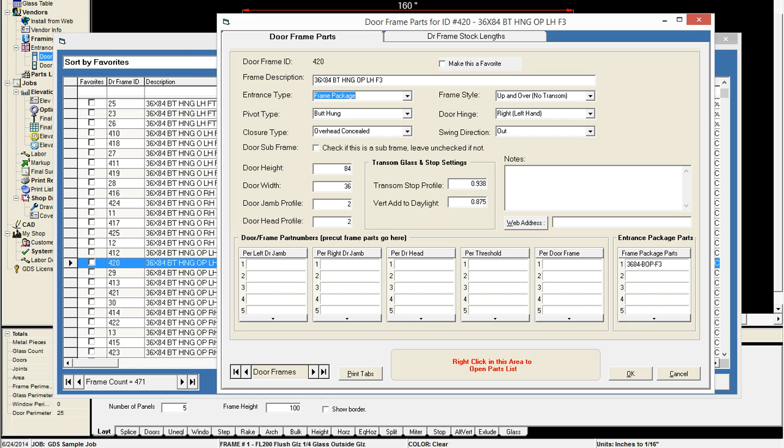Now if a frame package part number exists and we have stock lengths, it's going to use both. So whatever parts are here are going to get picked up by the software. It doesn't really care if it's package-configured for this entrance type, or if you tell it it's a stock length entrance—that's more just to help you identify what you're selecting. As far as the program's concerned, if part numbers are in these different columns, and there's stock length part numbers, it's going to pick them all up.

So in this case, you would want to decide what you need and what you don't need, and remove what you don't need. Let's say we need to add a door jamb stock length. I'm going to right-click down on the parts list box there—their frame descriptions are pretty brief.

Since we are looking for a stock length, I can do a couple things to filter the list. I can put a '2' here because most stock lengths are 200-something inches, or you can see their part type is extrusion. Let's do a little experiment: if we search '2' for stock lengths, we see 179 parts, and if we search extrusion, there's 184. So there's a couple stock lengths less than 200 inches.

So let's use extrusion to help sort these out. I'll try typing in the word 'jamb.' The thing is, it might show us wall jambs too. So if we do 'door'—offset door rails, so this is for door rails. You can actually do stock lengths for door leafs as well, and we'll cover that in the door leaf webinars.

So we might just be making stuff up here. Let's say this is a header for door frame, offset door header, vertical mullion door jamb—let's call it this one. It's an FL209, that's the extrusion we want to use for that jamb. We can go ahead and use that same one for the right jamb, so we type in the part number. Remember, you can always right-click and pick it from the list, or just type it in.

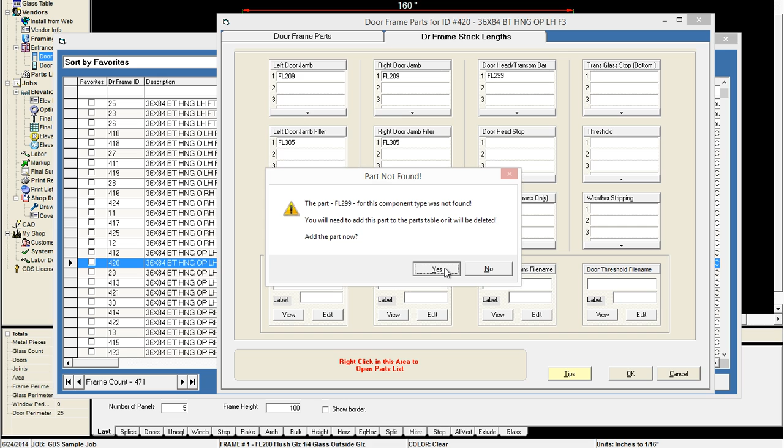We'll say yes, and this is where you'd kind of have to know some information. If your standard multiplier isn't there, you can just leave it at something else and change it later. You can always change it in the final parts report as well. So we can just make up some prices for the colors here, and just go with that.

So this is where we would pick the part type, and we could say door frame part. Actually, what's best to do here is make it an extrusion. Since it is a stock length part, it's more important for the program to know that it's an extrusion or a stock length. Either one would work. So if we scroll down, we could pick stock as well.

I kind of like extrusion now because that's a little more descriptive. But the program needs to see that part type for a few different things inside the program, especially when you get to the optimizer. So no matter if it's a door frame, a jamb, a head, sill, vertical, whatever, if it is a stock length, it's best to pick that part type here because the rest of the program is happier that way.

The profile is more for just your information if you ever want to find this part again. Let's say it's a 2-inch. And the stock length is important. We want to tell it if it's a 289 or a 288 or whatever it is, 290. So that's completely usable too.

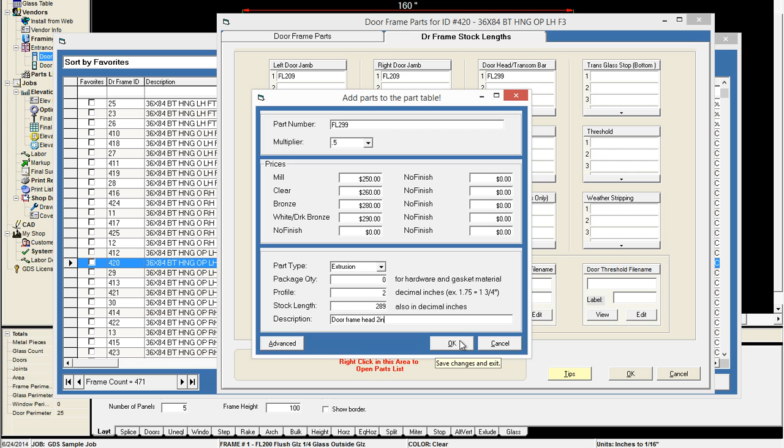So now I've added that part to my door head transom bar. And so we could do the same thing here, using a different part number. So you get the idea—you can add as many parts as you want in this screen, and the software is going to pick them all up. So let's go ahead and verify that right now.

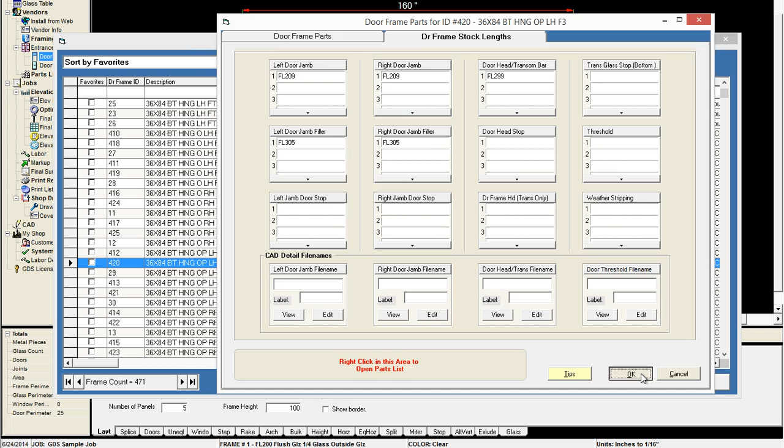So we were using door frame number 420 ID. These IDs are helpful, especially when there's a catalog that looks like this, because there's so many 3684s, there's so many butt hinges. It's an easy way to remember maybe what we were looking at.

Another way to do it is check the favorites box. And I like to click off of it—you'll notice when I check something or change anything on this row, it puts this little pencil here. That means I've edited something in this row. I can either arrow up to the next row or click on another row, and that ensures me that it saves it. I like to do that before I close the window.

And so now I'm going to close. So what I did was I changed this in the master parts list—I went to the master door frame list, not parts list, but door frame list. Went to the master list of door frames. I made a change to that ID number 420. And now I want to apply that change to this job.

The other option was I could have gone into this job and edited the door frame, which is a different frame. Like this one's left hinged. Now I forget what we picked here—let's go back and double check. So yeah, this was a right hinge, left-handed. So I'm going to be switching that.

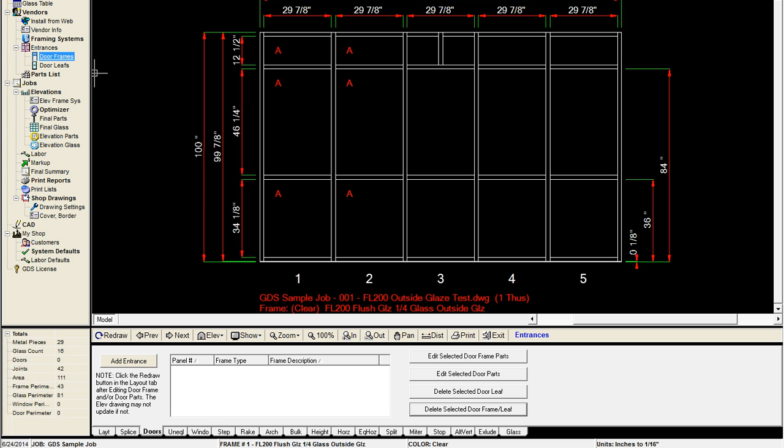So now I want to go to the add entrance. I'm going to tell it the same panel 3. I'm going to add the door frame, and I could add a complete entrance that uses this—let's see, how come it's not sorting? There we go. That uses this same door frame, and it would pick up the change. Or I can just go straight to this door frame and add it directly, and then it's going to add that door frame in.

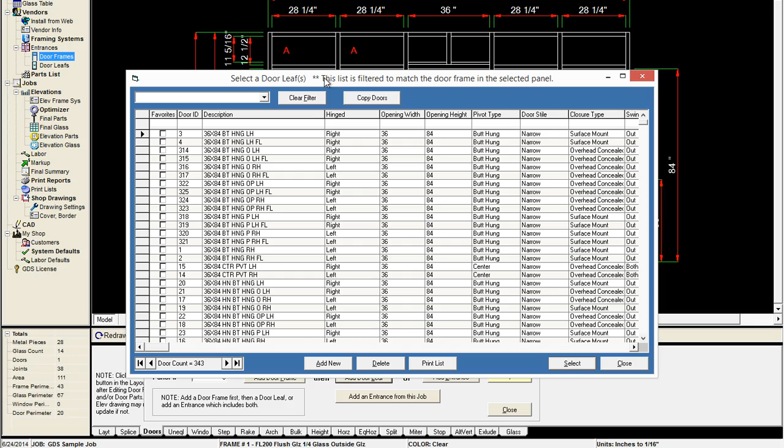Let's go ahead and add a door leaf real quick too. Since I've added the left... what was that added again? I got such a bad memory. I think it was right-hinged, left-handed, so it's coming up with a butt-hung left-hinged door leaf. Let's go ahead and select that. Yeah, there's our right-hinged, left-handed door.

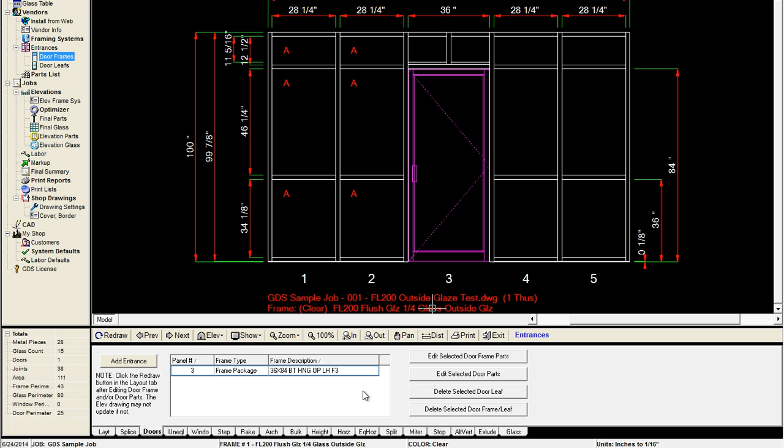Now what we're going to do is close this. We're going to go in and edit the door frame parts just to make sure it's using that same one that we picked. So here's all those part numbers I added. Those are the stock lengths.

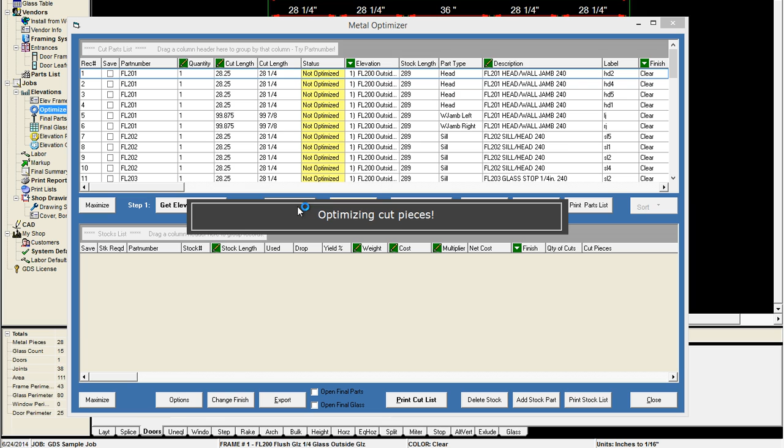Now I'm going to go ahead and optimize, and we should see those stock lengths be added into the optimization. I'll hit optimize, though I wouldn't even have to hit optimize to notice that. I could have hit get elevation parts and just maximized here, and then I should be able to see door jamb.

Here's some door jamb stock lengths. Here's a door head stock length. That should be that 299, right? So there we see all the stock lengths that I've added for the door frame.

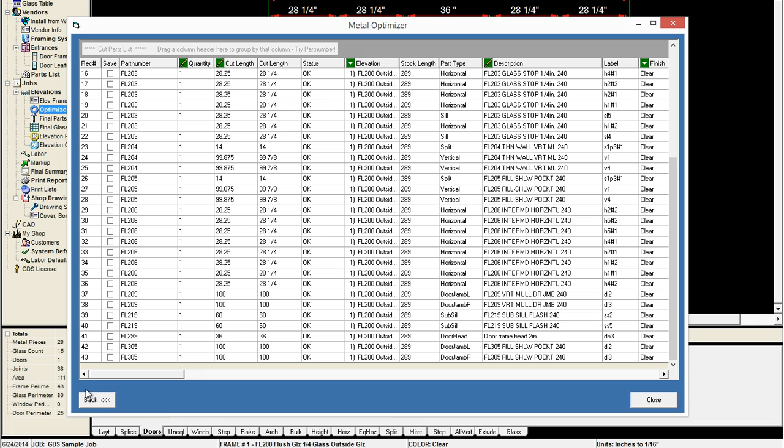So in order for those to show up on the final parts report, I would have to hit optimize. But in order to ensure that they were pulled in from the elevation, I can simply look at this top list after I get the elevation parts. Remember, in the optimizer, when I hit get elevation parts, it's pulling all the different cut piece stock lengths.

So only stock parts are used in the optimizer. It's looking at all the different stock parts for door frames and the elevation frame itself, and even door leaves if you told it to put stock lengths to create a door leaf. Any of those cut pieces are pulled into the optimizer in this top half. Then when we hit optimize, it's figuring out the optimization of how many of those cut pieces or how many stock lengths are required to get all those cut pieces out of. So that's the process there.

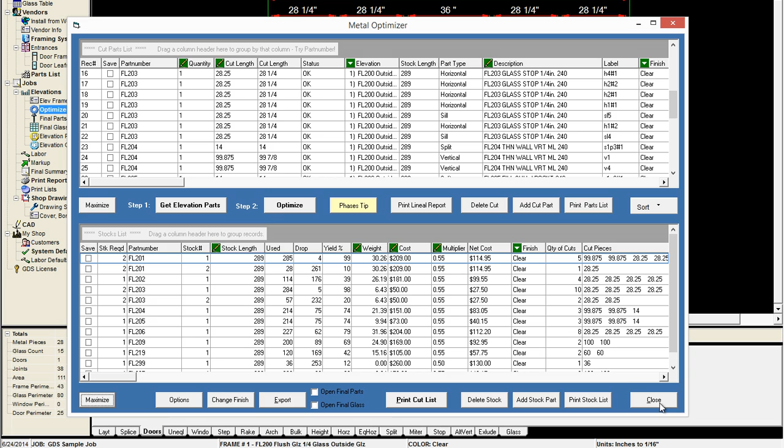Now we can go to our final parts, and we should not only see a package part number for the door frame, which is right here, the 3684 BOP. That's the door frame package. We should also see the stock lengths that we had. Here's the FL299, I believe that was the 219. So that's where anything that's added to that stock length frame is going to show up here, to the frame, door frame configuration, along with the package parts.

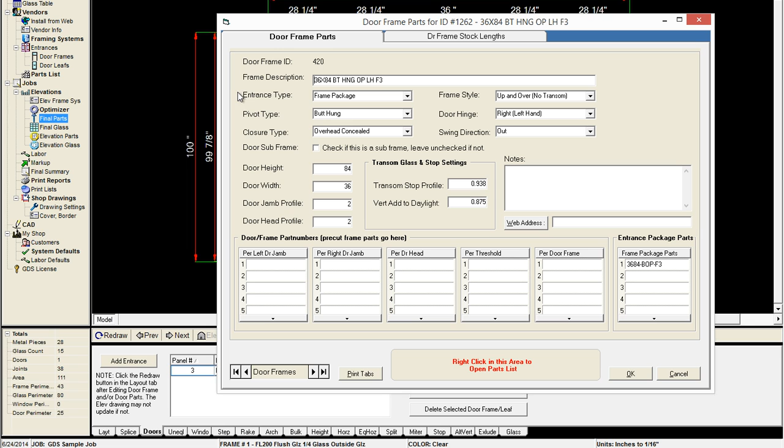And the same thing goes, let's go back to, let's edit the door frame parts here for the elevation. So it's a little confusing because this screen is exactly like the master screen, only it only affects this particular door frame in this elevation if I click the button in the doors tab like I did down here. So when I click that doors edit door frame parts button in this door tab, it's only going to let me edit the door frame in this panel for this elevation.

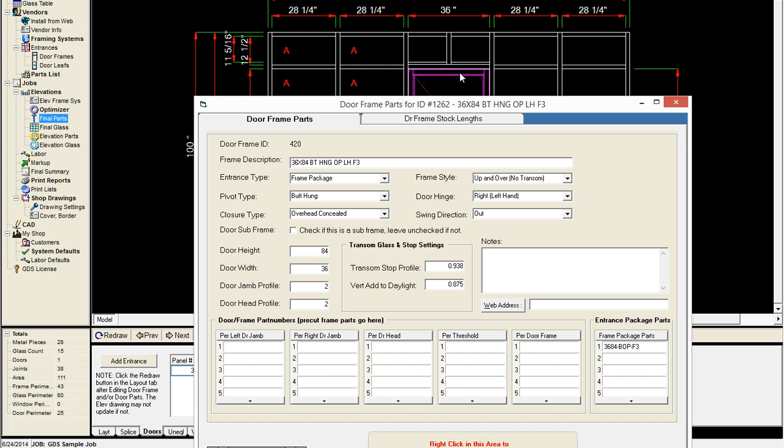Because I could have multiple doors in this elevation, and it would show me which panel those doors are in. So whichever one I click on, that's the one I'm editing here. So you just have to keep that in mind. Just like we've talked about in the other webinars, you need to know when you want to edit master parts and master frames, and when you want to edit the ones in a particular job, a particular elevation. So that's up to you. Once you have that figured out, I think it's a pretty powerful tool as far as how it's done.

So the same thing goes here for door heads. If it's a prepackaged door head, if it's a prepackaged threshold, any other miscellaneous per door frame part, whether it's a striker or some sort of latch or hinge or whatever, that can be put here. These are really the same because they're kind of generic. All these parts are treated generically. It's just helping you decide or know what's what by labeling these columns. And it also helps when it shows up in the final parts report—it looks in these columns and determines what it is from these column heads. So that's why it's important to put them in the certain spots.

So now back in the stock lengths. Anything you put here is going to go into the optimizer with the exception of weather stripping. Weather stripping is a little different, that should show up as gasket material. So let's go ahead and click on weather stripping. We're going to go here and let's see if they have anything.

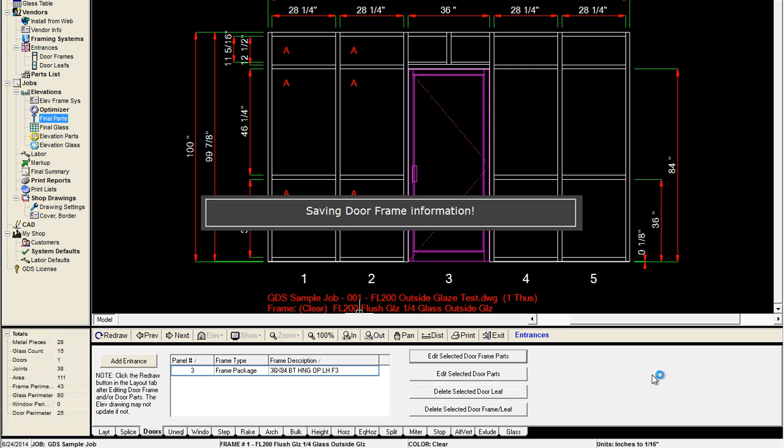Now what should happen is the weather stripping should show up. Let's go to elevation parts, even though there's only one elevation. I think we're in the sample job, so we're going to go to elevation parts. We've got the one elevation. Now what we should see is the weathering.

Sometimes you have to redraw. Did I show weather? Yeah, there it is. So there's our weather stripping. It's saying we need 17 feet of it.

Notice how I didn't have to go to the optimizer. It's a little confusing, the fact that we went to the door frame parts, and in the stock lengths tab we threw in a weather stripping field. But that's the only thing in here that's not, aside from the details, a stock length part, because everything else would show up in the optimizer and get optimized into stock lengths for your final parts summary. So the exception here is weather stripping.

You notice that when we added that in, it redraws the elevation and then it shows up right away under elevation parts, which means it's also going to show up under final parts.

Yeah, so it's the last thing here. It was a W part, and it just calls it miscellaneous.

That might be because when we got into it here, now that I've added that part to my job, basically through the framing system stock lengths tab, I can make changes to it, but I need to make changes in the job parts window if I only want to make changes to the job for that part. So I want to go to edit job parts. We're kind of going a little bit off tangent here, but this is important to know.

The reason that miscellaneous showed up under part type is because that's what the master parts list showed for this type of part. So if I want to change that, I can click in here, and I'm looking at just the parts for this job now. So if I make this change, you'll notice when we go back to the master parts list, it won't be there.

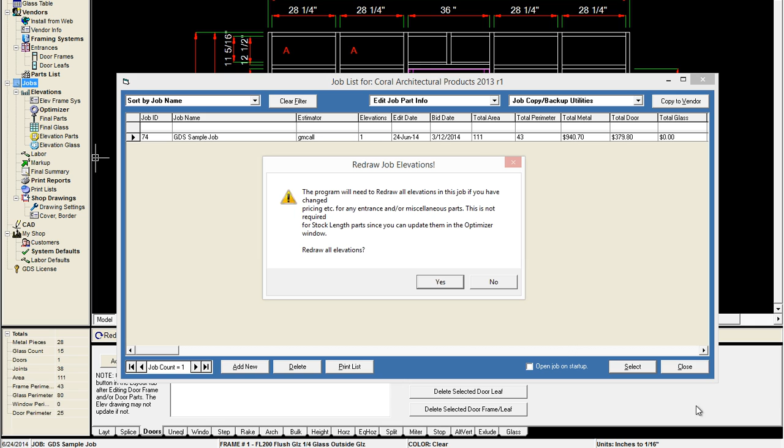But I can put weather seal. We have an actual part type that you can select for weather seal. So once I change that, remember how I like to click off of this row, so I'm going to arrow up to the next row. I can hit close. It needs to redraw the elevation, which is fine. And then I can hit select, and actually it'll redraw it again when I select it.

Now when I go to elevation parts, I should see that weather... where are we here? W, oh, it's down. So see, I changed the part type for weather seal.

So I updated this job from the job parts window. I could have changed the multiplier, I could have changed the price, the description, whatever. But in this case, I just changed the part type. So I did that. It updated it for this job.

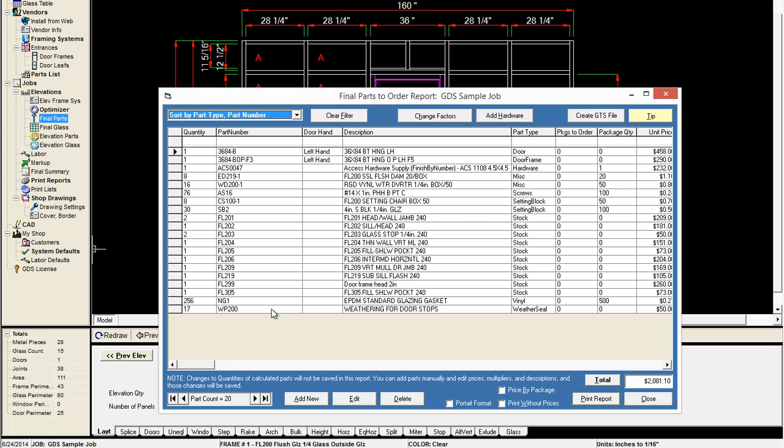Now to prove that it didn't update it in the master list, we're going to go back to the W200. Oh, wasn't that what it was? It was a W, oh darn. Am I confused on what part that was? I'm going to go to final parts this time. Oh, it's a WP200, I'm sorry. So we're going to go back to parts list. We're going to do WP200, and there's our part.

So notice how it's still miscellaneous here. So if I wanted to, I can change this to weather seal here. That, and it's a good thing. I can change it, and it's going to apply to every job that I create from now on that uses that part.

But also what I might do is weather seal for door stops. I'm going to change that to upper lowercase because it was all uppercase before. Notice how I can't click off of this row now because there's only one part. So I can actually clear filter, but then it gets me away from that part I was on.

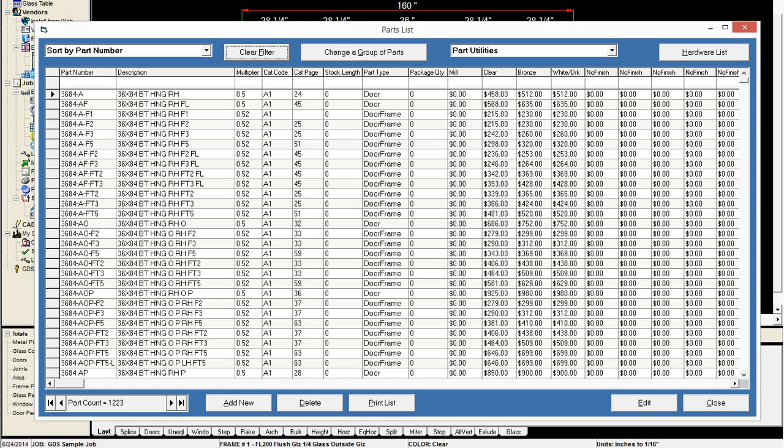So when it's only one row, I'm not worried about clicking off of it. So you just have to go ahead and close the window then.

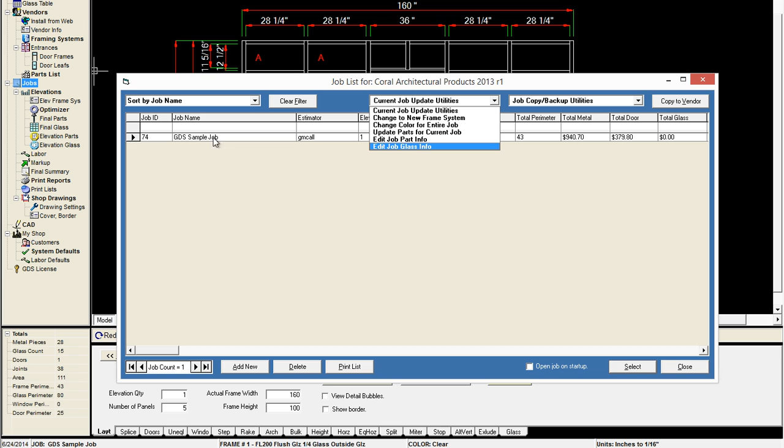Now if I wanted to update the jobs that use that part, this is another little trick. If I want to update the jobs that use that part number after changing that part in the master parts list, I can do that by going to the jobs window, clicking this update utility and saying update parts for current job. I know what my current job is because of the little arrow here next to it. I've got only one job here anyway, but I'm going to update the parts for this job.

And it's going to update it. It was updated. So now I'm going to select the elevation again. And what I would do now to prove it, I think it redrew the elevation, but I'm going to do it again anyway.

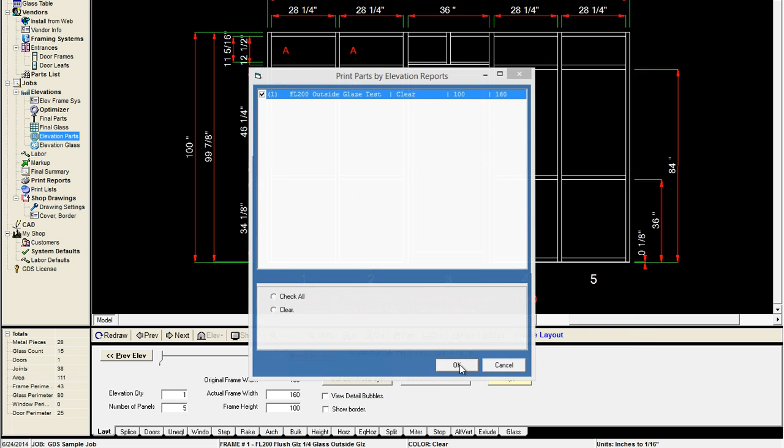So now we can go to elevation parts. We can go to our parts list for the elevation, scroll down. Now you'll see the description is upper lowercase.

So that change that I made to that part in the master parts list was now applied to this job. So there were two ways for me to do it. I did it one way first. I changed the weather seal type in the job parts window just for this job. Then I went back to the master parts list and I made some changes to that and applied those changes to the job.

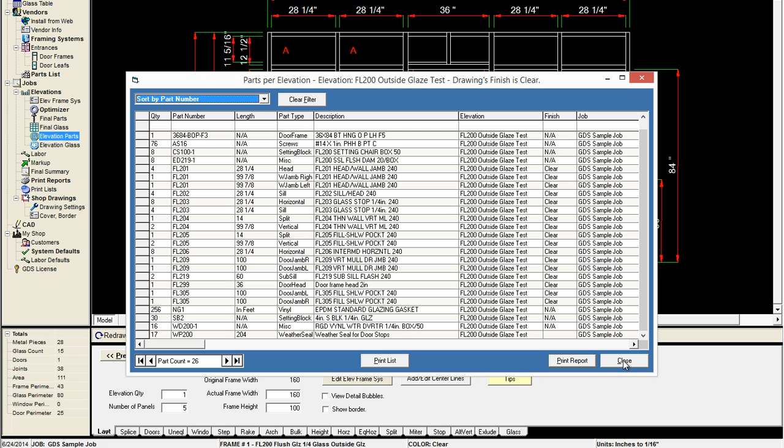So you can do it either way, but that's basically how it's done. So it's that simple. So now let's go back to, I'm sorry, I definitely want to make it clear that there's a difference between editing something for the job and the elevation as opposed to editing the master.

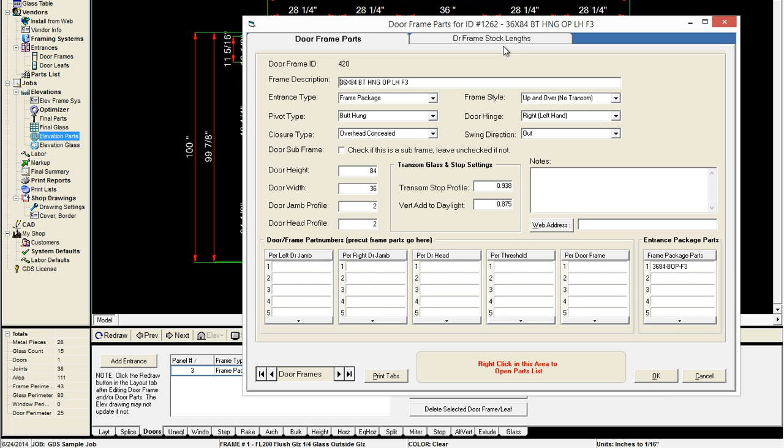So now we're going to edit this elevation again. We're going to edit the door frame for this elevation. I am going to go back to the door frame stock lengths tab. Now let's say you need to add a detail to this jamb that we got.

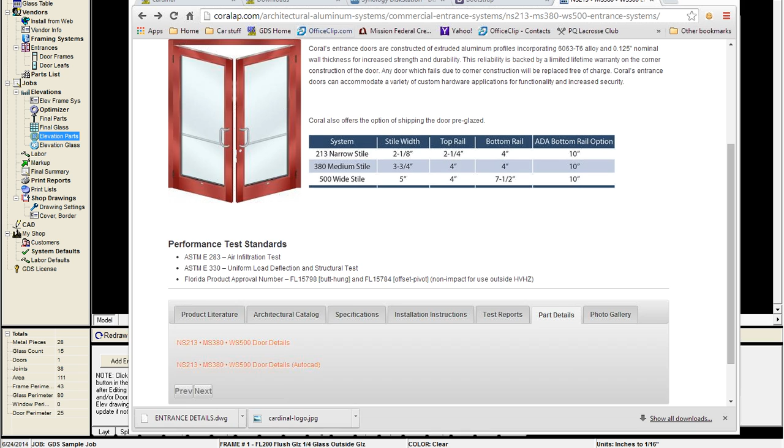What I would do is, even if I have to go to the vendor's website, if I have to go to Coral's website and try and download a detail file, I would go to their website. So here we are at Coral Architectural.

And I went to, let's go ahead and go home here, we're going to go to the home page. I went to their home page. I went to entrances, and then they've got their different types of entrances listed. And let's just say it was this type of entrance.

We have so many different catalogs, I don't really know any of them intimately. But let's say I know there's details on this website, and that I can download the details I need. So I'm going to go to where the entrance is listed, go to the part details, and I'm going to see that they have door details here for AutoCAD. So I'm going to click that.

It's going to download that detail for me. Now I'm not really sure what's in that detail yet because I haven't seen it. So now that I've downloaded it, I'm going to have to go to my download folder, and I'm going to go by date here.

So here it is. And this, with Google Chrome, as soon as you download something, it's going to go to your download folder automatically, unless you told it otherwise. So now I've got this file. Let's just say this is the file that I know I want, and I want to put that somewhere in my Coral catalog so that it's permanently filed away in my Coral catalog.

So what I'm going to do is cut this from my download folder, and find my Coral catalog. So I'm going to go to my C drive, go to WinBidPro, and here's my Coral Architectural Products.

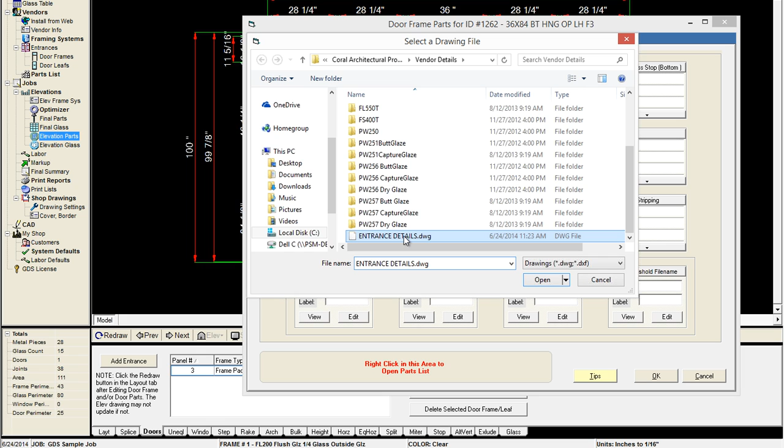So now that I know where that file is, I can go ahead and minimize my Explorer window or my Chrome. Now I can double-click in this blank details field, and now it's bringing up my Coral Architectural vendor details folder, and I should see that file. So here it is, there's entrance details. I select it and I hit open.

It adds it to my field here like I wanted it to, but now it could use a label. So most of the details, when they show up on the drawing, they should have a label like a 1, 2, 3, 4, whatever. Since I don't know what other labels are being used already, I'm just going to make up a bigger number, like I'm going to call it 20.

So that's just giving it a number so that it knows what to put in the bubble when it shows up on a drawing. But let's go ahead and view that detail so I can see what it's actually showing us.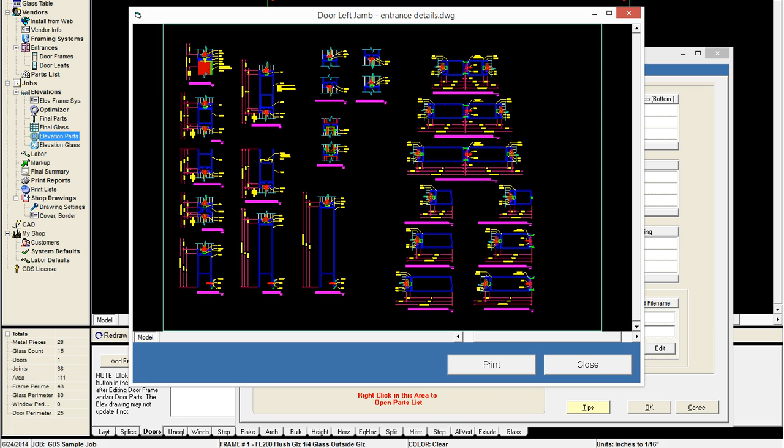Okay, so when I view detail, it's using our software to open the drawing, and I can click in here and zoom in so I can see what's going on. And it looks like it's showing me a muntin with glass above and below.

So panning's a little different. We can go down here and scroll over. There's another muntin that looks like a flush door panel. Oh yeah, insulated panel there.

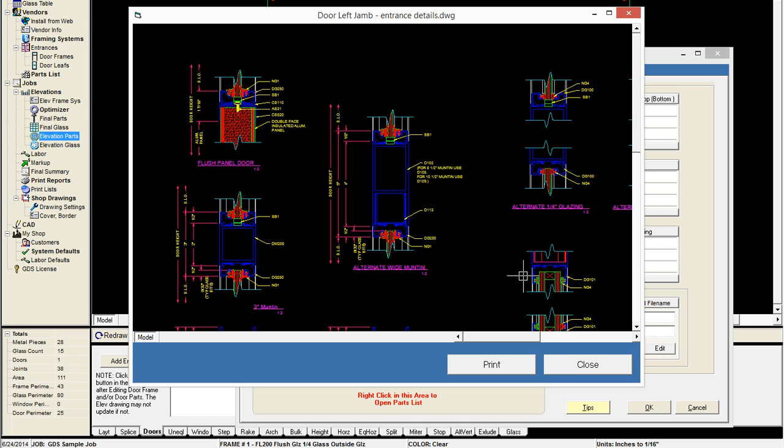Okay, so all these different details are in this one file. So now, if I wanted to, I could say, and I put this under left door jamb. Now that detail is actually for a lot of things, but you can just leave it under left door jamb. As long as you don't put it under twice, then it won't try to open it up two times and show you too many details.

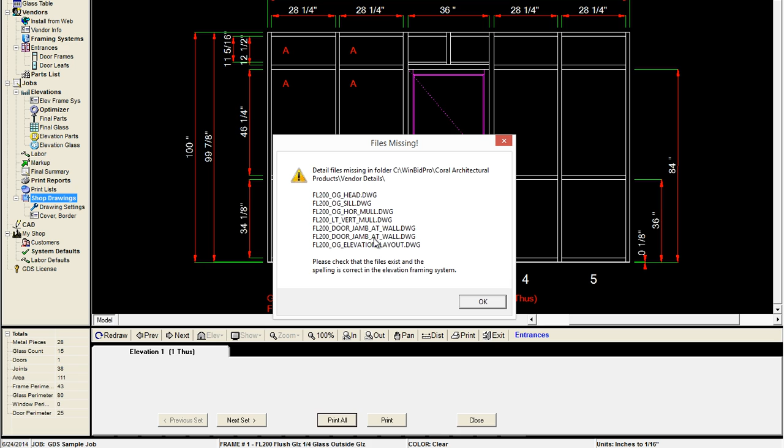So let's go ahead now back to, we're kind of getting into the details part of the program, but that's fine. Let's go here to shop drawings. I'm going to click that. So it's not finding some details for other parts of the drawing, but it should show me the door details because I know those are there.

So now if I want to work with those details, I can actually click my CAD. If you guys already have your own CAD program, then you know you can just open it up and work on it. But if I wanted to use our built-in CAD program, now is where I can separate some of this, and I might have to explode it actually.

So there's going to be webinars and videos on this whole CAD program, and obviously if you have your own CAD software, there are other ways to learn that. But basically, with this CAD software, I would be able to copy and paste, move things around, delete some of these if I don't want them, rename the file and all that.

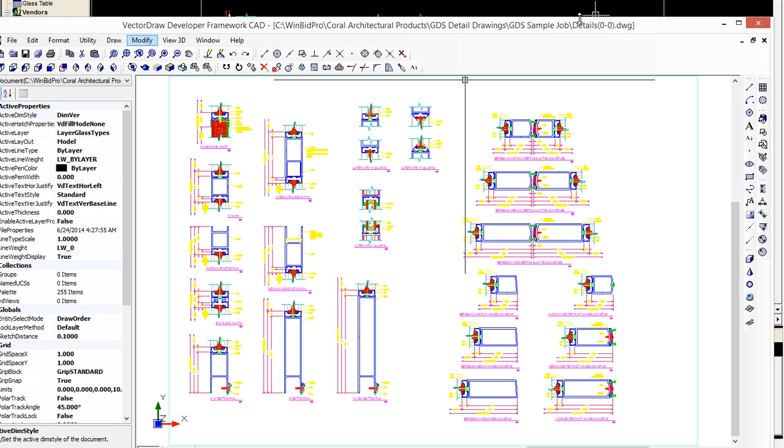So you can work with details that you download from the manufacturer's website. This tool is a little bit limited because of the lack of help documentation and all that, but for the basic shop drawing needs for most glass shops, it actually does an okay job.

But that's an example of how you would download a CAD drawing, whether it's for doors or for any other part of your frames, apply it to a system in the program, and then use it in a job, and then open up the drawings and open them with CAD. So that's kind of the whole process for that.

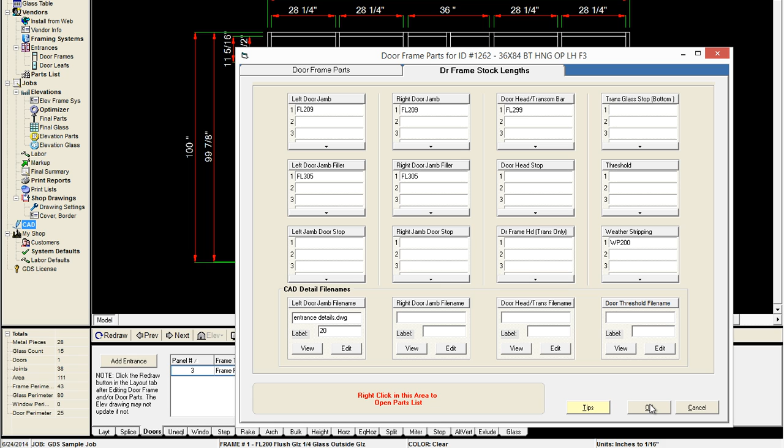And remember, I added them to this elevation parts just for this door frame, and not to the master. So again, if you wanted to do something where one time you were going through your master list of door frames and you wanted to configure, let's say you had 3 or 4 favorites, with the proper details, you could do that by either ahead of time creating the file, making sure that a certain file has the left door jamb, the right door jamb, or just have one file like we did with a bunch of them in there with all these things.

As long as the program sees that file name here, each time you use the shop drawing tool, it's going to look for that file and open it up and put it in the shop drawing window so you can print it or open it in CAD and work with it more. So that is how the CAD tool works in general.

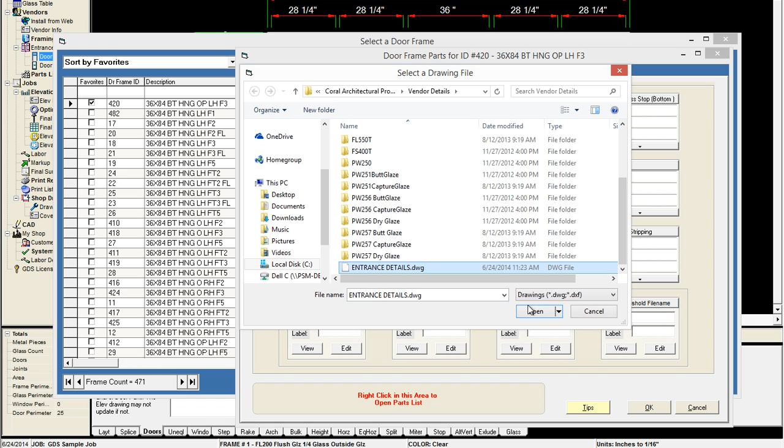It's the same thing for door leafs. It's the same thing for elevation frames. So, if you remember, all we did was double-click in there. It took us right to the vendor details folder. I selected entrance details, hit open, gave it a label, and then we're done.

And then I can go ahead and hit view just to see that what I put in there is the right thing. So a lot of times what you'd want to do is, I'm going to show you one more thing for the details. Make sure the detail is right before you use it. So in that case, I would actually go to my hard drive, go to my C drive.

I'd find where I put that, and just to go over that part again, if I'm looking at my C drive, I open up WinBidPro, I open up Coral Architectural, and then I open up vendor details. So now you notice there's a couple new folders that it added.

The reason for that is that when I clicked that shop drawing button on the job I was in, it created a folder for the elevation drawings, which it names with the job name as another folder, and here we have the elevation in a DWG format, so that's how I'd get that.

The other folder was for whatever details we told it to use for this job. It puts those in its own folder with the job name and shows us the details here. That's what happened when I clicked that shop drawing button back in the main menu - it created those two folders and subfolders within them and put the DWG files in there, as long as you tell the software where to put those drawing files.

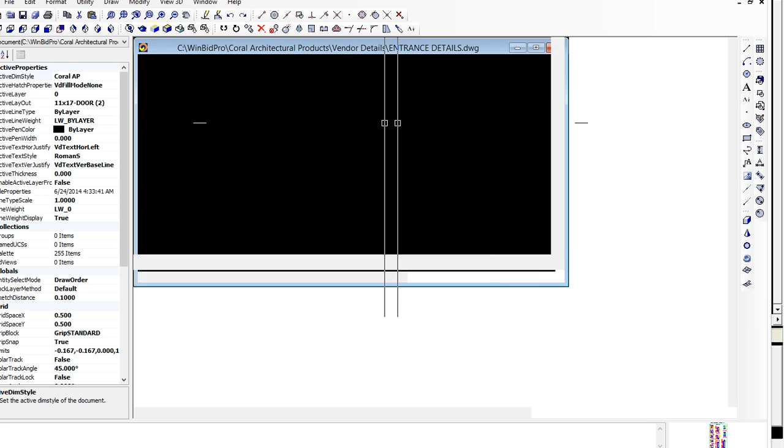None of these programs will open it for us, so we need to tell it to look for another program on our computer. We know that in our WinBidPro folder - if I open this up, let's go down to WinBidPro, we know that little free program we include, the VCAD, is inside WinBidPro, inside VCAD, and the newest one is called NewCAD. So if I select that as the program that opens this type of file, now I can see it - this is what it looked like from the download that I did.

So this is the entrance details DWG. Now this is where you need to know how to use the CAD program. This is kind of a lot - many vendors will have individual details that you can download, so it really depends on which one you're working with.

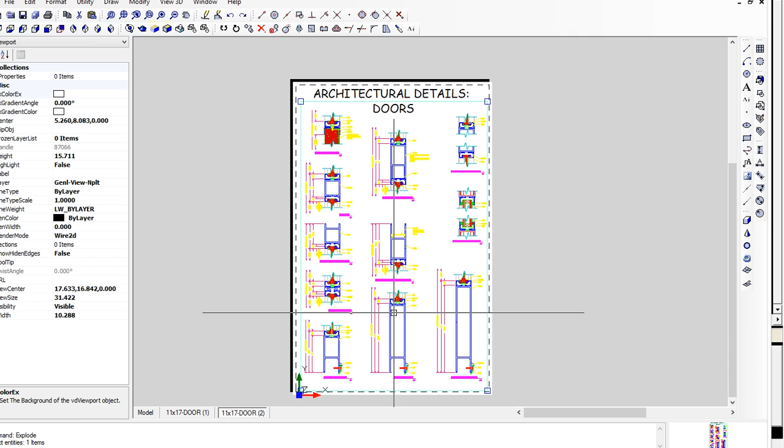In this case, it might have to be exploded, it's not letting me select individual things. So like I say, we're going to be doing some more videos on the CAD tools themselves so you can figure out different things to do with this particular tool, but I'm not going to save any of those changes. The concept is, you now know how to put the detail drawing on your computer and tell our software to use it in a certain situation.

So the situation for us was: when that particular door frame is being used, open that particular detail, and then you can just print it out if you need to, or you can open it in CAD and modify it or change it.

So that's pretty much the door frame stock lengths tab. All the things we just covered are really all there is to it, and the rest was in the first tab for the parts and profiles and things. But just remember, any parts listed here will get included with any parts listed in the stock lengths tab. So if parts are showing up for door frames that shouldn't be there, this is where you need to look, either of these two places.

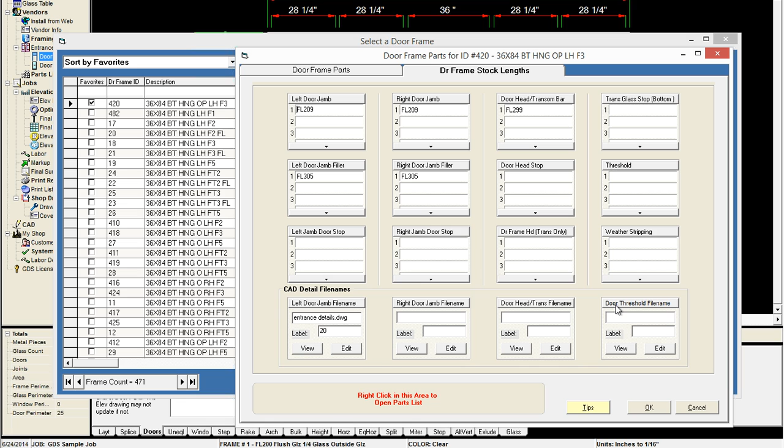If you need more parts to show up all the time, you add them in here. If you always want to use filler material, or always want to use a stock length threshold or anything like that, you know how to add it now. And if it's something you always want to happen every time you use that frame, you want to be editing the master door frames list like we just were. If it's only a one-shot deal for a panel in an elevation that has one entrance or whatever, you can edit that elevation, edit that door frame, and change it just for that one thing.

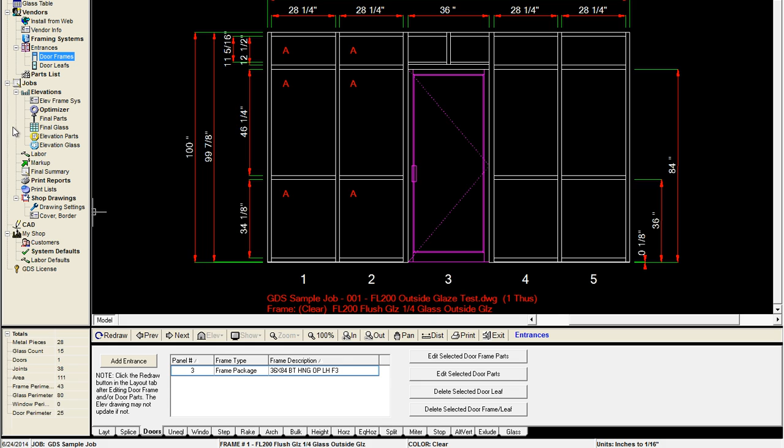So that's pretty much it for door frames. Feel free to ask any questions.